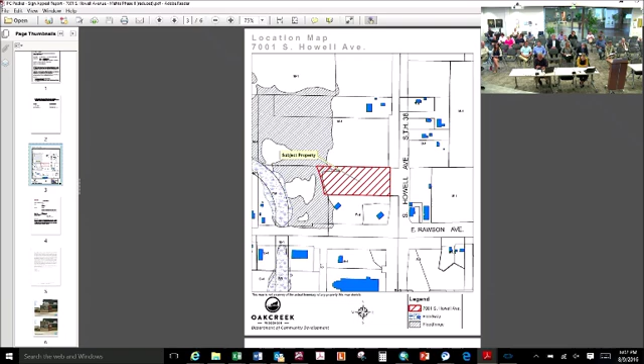This is a public hearing. It is now open. If anyone wishes to have comments, they can step up to the podium, state your name, and address the Plan Commission with your concerns. Make 3 calls for public comment on this item. First call. Second call. Third and final call for public hearing on the sign appeal for the property at 7003 South Howell Avenue.

Seeing no one coming forward, we'll close the public hearing, move to discussion of new business, and the first item is item 5A. It's a consideration of a request for sign appeal for the property at 7003 South Howell Avenue, submitted by Pamela Mehta, that would allow a ground sign not to exceed 12 feet in height and not to exceed 100 square feet on one side or 200 square feet on all sides.

Tax key number 734-9028. Pete: As I mentioned in the public hearing notice, the applicant is looking for a variance from the sign height for ground signs. If you're familiar with the site, it's the medical complex on Howell Avenue, north of Rawson.

And right now, they currently have an 8-foot monument sign, which is illustrated on your screen on the top of the page. And as we talked about at an earlier Plan Commission, they are proposing a building number 2 that is located right behind this building. And we worked with the applicant, tried to figure out alternatives to what could be done and still meet the criteria that is used to determine a variance, which is included in your report.

So the applicant believes that this is the best course of action to pursue, and to add 4 feet to the existing ground sign. By doing this, it would not cause confusion or cluttering of signs that would be confusing to drivers driving up and down Howell Avenue.

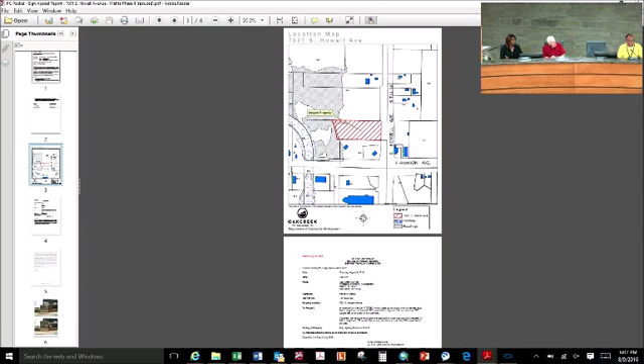Off the top of my head, I believe that's 14 feet, maybe 17 feet tall. That was a variance that was granted because in that particular case, they went from a 25-foot tall sign and came back and said they'd make it less, make it a directory sign, more simple, identifying the 3 businesses there, as well as having an EMC board.

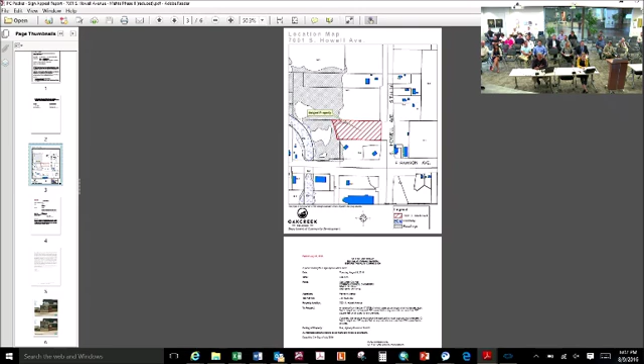Commissioner Chandler: Is the applicant here? I have a quick question for you. Name and address for the record. My name's Peter Ogorick, architect with Perspective Design, 11525 West North Avenue, Wauwatosa.

So how many tenants are in this area total? The building in the front, I believe, was designed for 8 tenants, if I remember correctly. The building in the back, I think, is 7. So 7 in the back, and 8 in the front.

So the number of spaces you have on there, is it 16? Must be 9 in the front and 7 in the back. So yeah, we laid it out to have basically a sign panel for each tenant space.

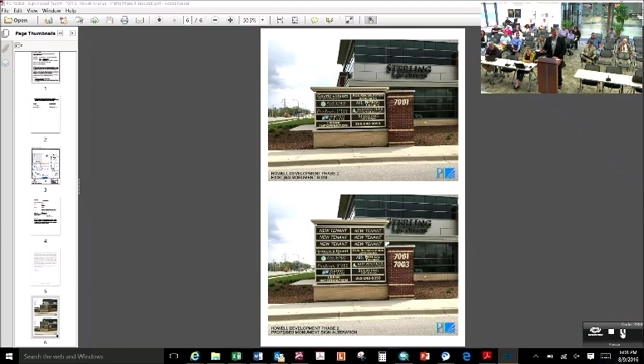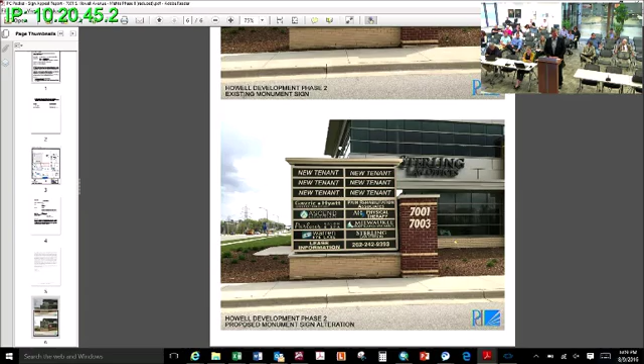Also with the letters, are there any differences that will help differentiate each tenant? Because that is a lot of information on one side. We'll be discussing the balance of the sign plan next on the agenda. For the building signage, we're trying to leave that open so individual tenants can have their corporate colors and logo. On the monument sign in front, we've intentionally tried to keep a uniform color effect so it's not any more cluttered than it already may be.

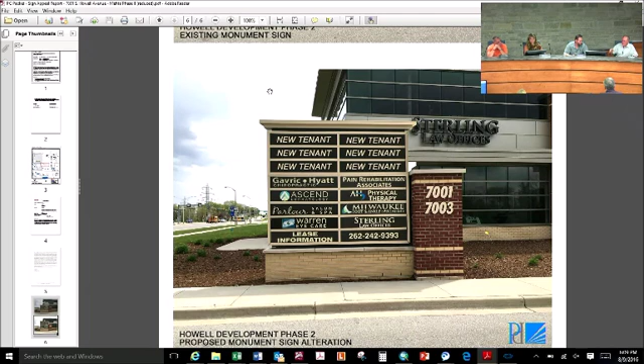Commissioner Dickman: If they went to a second sign of this type, that would require a variance also, right? Correct. So whether we have this variance or do a variance for that, I'm all for this. I think it's better to have just one sign, although there's quite a few people on there. I don't want to talk about the sign design now, but I don't know if you'd want to differentiate on the sign so people knew which ones were in one building versus the other. Just a comment, that's all.

Other questions or comments? Commissioner Siebert: How many tenants do you have in the back? The building in the back is designed for 7 tenants. We don't have any tenants right now, but it's designed to accommodate 7. And on your sign, I see it only has space for 6 tenants. Yeah, that's because we had one extra sign panel from the front building. If you look, I think we're at 9.

So we have 10 sign panels that were on there initially, but the building was designed for 9 tenants. So we've got a balance now between the number of panels and the number of spaces that are designed into the 2 buildings.

Anybody else? Seeing nothing, hearing nothing, motion on 5A. Is there a motion required, Pete? Yes, there is. I thought that would be covered in 5B maybe. 5B is the sign plan for a multi-tenant building, which is required. Commissioner Dickman challenging the chair?

Go ahead. Oh, you making it? Oh, go ahead, Pete. Bukiewicz will make a motion that the Plan Commission approve the proposed sign plan for Building 2, granting a variance from 8 foot to 12 foot at 7001 South Howell Avenue. Guzekowski will second. Guzekowski seconds, roll call.

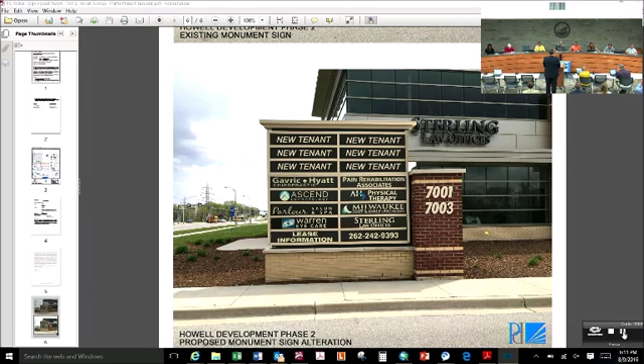Hickman, aye. Bukiewicz, aye. Speedy, aye. Guzekowski, aye. Seifert, aye. Chandler, aye. And moving to item 5B is a sign plan review of a proposed sign plan submitted by Pamela Mehta for the commercial building at 7003 South Howell Avenue, tax key number 734-9028.

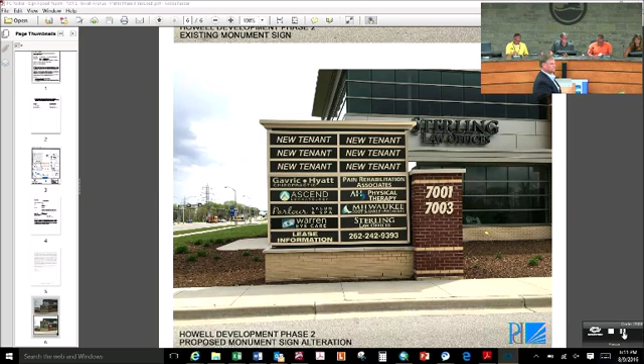Pete? Yes, thank you. I'm just bringing up that plan. The reason we had the variance prior to the sign plan is because in the sign plan is included a 12-foot monument sign. So before we went to the sign plan, we should make sure that we agreed that the monument sign was acceptable.

As per code, every multi-tenant, 3-tenant building or more is required to present a sign plan to the Plan Commission for approval. And the purpose is to get a theme or a sense of consistency among all the signs for the multiple tenants that may be present at the site.

So there was a building or a sign plan approved for Building 1. This is going to be the sign plan for Building 2. So anything that's approved tonight is going to be specifically for Building number 2 and for the monument sign.

And I just would like to share my opinion that the applicant provided a very robust and detailed sign plan that really details not only the style, the size, the quantity, the height. It also took a lot of the existing sign code and included it verbatim into this plan.

And the reason I take the extra time to say that is that when I looked at the sign plan for Building number 1, it was like, well, go no larger than 34 square feet and have channel letters. That was it. So I just want to give credit where credit's due that they did take a lot of time to go through it.

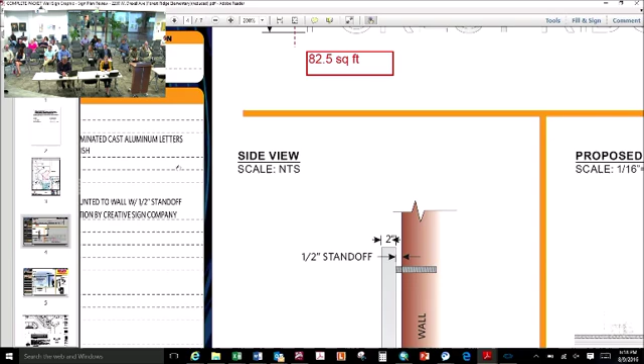As part of any institutional sign plan, Plan Commission does have the authority to review and approve all signs in that zoning district, which is why the school plan is here tonight. They have 2 signs; one is a wall sign that complies with the standards in our code. The standards state the wall sign shall not exceed 12 inches outside the building's wall surface, which is fine, and must not exceed 20% of the wall area, which it does not. It does not exceed 300 square feet in area or 5 feet in height. Overall, the wall sign is 82.5 square feet in area, 2 feet tall, and less than 20% of the wall area. This sign is not illuminated, is constructed out of aluminum, and will be placed on the south elevation of the building.

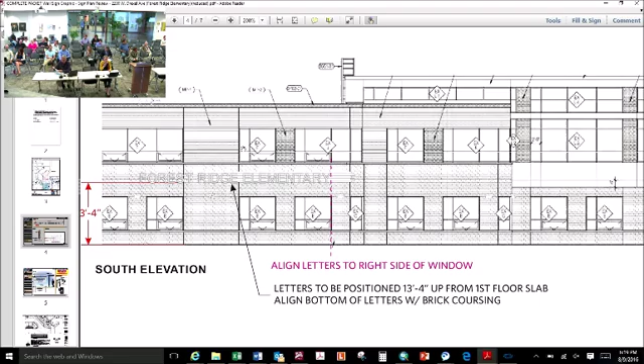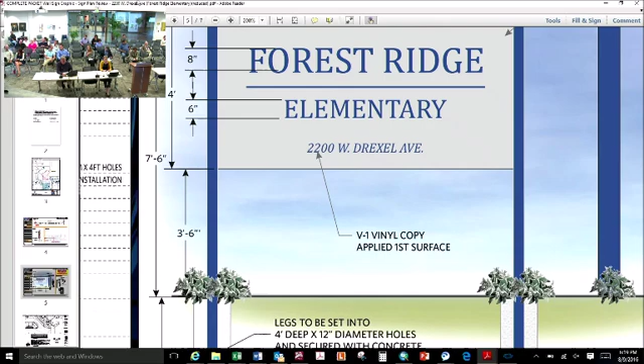The second sign being brought before you tonight is a monument sign. This sign also meets the zoning code for sign regulations. The sign does not exceed 10 feet in height, which is the maximum, and is not larger than 64 square feet in area. It is located well within the setbacks of 10 feet from the right-of-way or other lot lines, and complies with the traffic safety visibility requirements set forth in section 170401. What's not shown here is the landscape plan, but I do have it in your packet and can bring it up for your review; this is just a clip of it.

This just shows some shrubs that are going to be around it, and some flowers and annuals, which is the minimum requirement for this type of sign. Having said that, staff recommends approval of the sign plan proposed by the school district for Forest Ridge Elementary School, located at 2200 West Drexel Avenue.

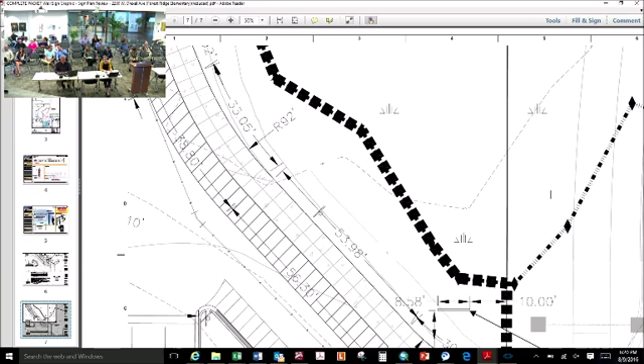This is for the new 7th elementary school for the district. Any questions from the commission? Commissioner Chandler: I have a question for the applicant. Is Kathy Kramer here, or the representative? Please state your name and address for the record. Bob Weigert from Epstein Uhen Architects, 333 East Chicago Street, Milwaukee.

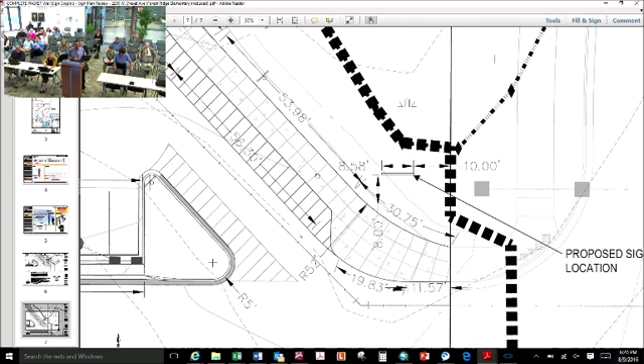Regarding the wall sign, can you give more information about colors and its relationship to the monument sign? Sure, the wall sign is an aluminum color that basically matches the window system of the building, a clear anodized aluminum. The monument sign is also aluminum, with blue painted legs, a baked-on finish. The field where the letters are is a similar finish, not clear anodized, but more of a silver type color. So the wall sign will match the background of the monument sign? Correct. Thank you. Other questions?

Alderman Markiewicz: this doesn't exactly pertain to the sign, but it's for Kathy. All our schools have mascots, has this particular school picked one? They did, and I can't remember what it is. I think the parent group worked on that when they decided the name. I'm not sure if it was suggested, but the Butler Garter Snakes came up as a suggestion, I think, but I'm not sure.

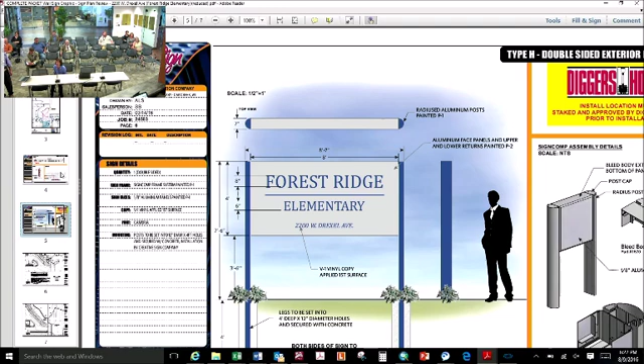I'll have to follow up with you on that, I can't remember if Mr. Midtake finalized it. I know it was in discussions, and we have the ribbon cutting scheduled for August 29th, so you should have that history of the Butler Garter Snakes by then. Great, anything else? Nope, looks good. Motion.

Kavich makes a motion that the Plan Commission approve the sign plan for Forest Ridge Elementary School located at 2200 West Drexel Avenue. Guzikowski seconds. Roll call: Hickman, aye. Johnston, aye. Furlong, aye. Kavich, aye. Guzikowski, aye. Seifert, aye. Chandler, aye.

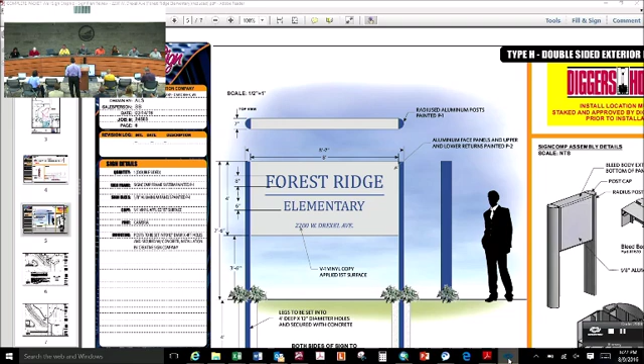Good luck, thank you, see you. See you on the 27th.

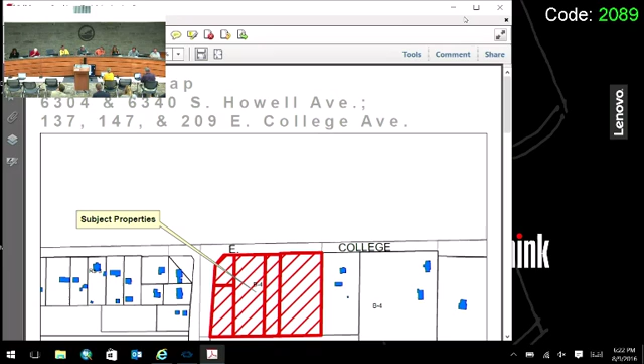Moving on, item 5D is a certified survey map review submitted by Kelly Gallagher of Self Storage Ventures LLC, combining the properties located at 6304 and 6340 South Howell Avenue and 137, 147, and 209 East College Avenue, tax key numbers as listed.

This application is to combine the five parcels into one 6.2873 acre parcel. This is the proposed survey map shown on the screen right now. As you can see, the wetlands are shown on one parcel. There is a requirement for the utility easement to be shown along the north and west. I was also told the state may have some access requirements on the west side, possibly a restriction, which we'll find out once the state completes its review of the certified survey map.

The staff recommendation is that the Plan Commission recommends to the Common Council that the certified survey map submitted by Kelly Gallagher of Self Storage Ventures LLC for the properties at 6304 and 6340 South Howell Avenue, 137, 147, and 209 East College Avenue be approved subject to conditions 1 and 2.

Thank you, Carrie. Any questions? No questions, motion.

Kavich makes a motion that the Plan Commission recommend to the Common Council that the certified survey map submitted by Kelly Gallagher, Self Storage Ventures LLC, for the properties at 6304 and 6340 South Howell Avenue, 137, 147, and 209 East College be approved with the following conditions: 1, that all easements are shown and clearly labeled on the map prior to recording; 2, that all technical corrections, including but not limited to spelling errors, minor coordinate geometry corrections, and corrections required for compliance with the municipal code and Wisconsin statutes are made prior to recording.

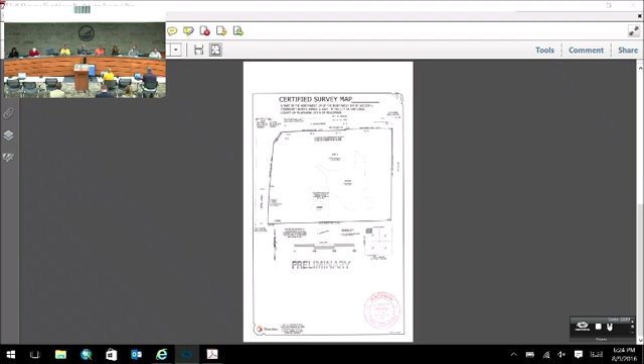Item 5E is a right-of-way vacation request submitted by HSI Oak Creek Partners LLC on behalf of Mary Volker, Margaret Munson, and Life Creek Church, Inc., for a portion of the southeast quarter of the southwest quarter of Section 10, affecting 2100, 2200, and 2280 West Drexel Avenues. Carrie.

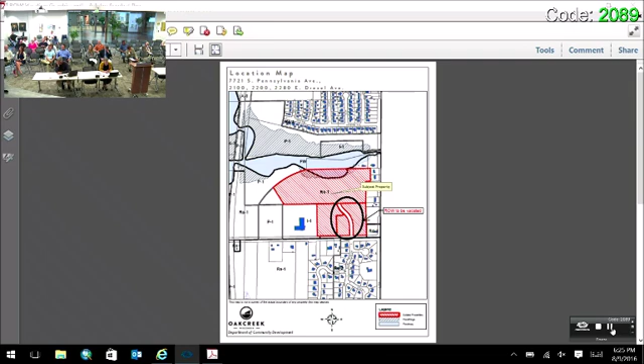This is a request to vacate a portion of the existing public right-of-way. In 2010, a CSM was approved that dedicated the 70-foot wide right-of-way for public street purposes, done by the church. This exhibit shows the part of the public street right-of-way that would be vacated if the Plan Commission and the council were to approve this.

Instead of having it be a public road, the proposal is to make a private road that would not necessarily follow this exact pattern. It's related to the multifamily development for these properties. There is a requirement requested by the utility that a 25-foot water main easement be depicted on all of the submitted recording documents for this property.

The staff recommendation is that the Plan Commission recommend to the Common Council that the 70-foot wide unimproved right-of-way affecting a portion of the southeast quarter of the southwest quarter of Section 10, between 2200 and 2280 West Drexel and between 2100 and 2280 West Drexel, be vacated after a public hearing.

Mr. Mayor, right-of-way vacation request. Questions from the commission? I also have two audience members who have requested this. Commissioner Chandler, and then I'll go to Commissioner Seibert.

A quick question, Carrie. Can you show us the area being considered for vacation? Is it the area that's circled? Yes, it's the area that's circled, that portion of right-of-way right there. Okay, thank you. Mr. Seibert.

I'd like to know the reason why they want to make this a private road. I will defer to the applicant. Applicant is here—name and address for the record. Tony DeRosa with HSI Properties, 18500 West Corporate Drive in Brookfield.

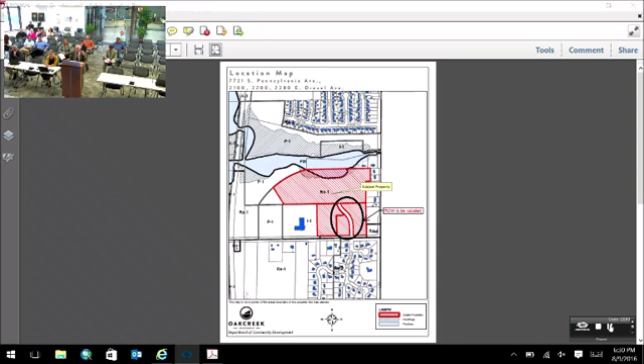We need a public road there. And not only that, but think of all the utilities that have to be handled for each individual party in this area, all coming out of a private road which is not built to public specifications. It doesn't require any long-term upkeep, especially with the developer selling out to someone else.

As I mentioned before, safety is the important thing. How can we have a safe community if we've got 640 parking spaces as a build-out and somebody wants to have a rumble? All they have to do is block off one road, two roads, and no one has access. This cannot stand. Safety of our community is most important—the safety of our children—and making this a private road through this cannot stand. We have public roads for a good reason.

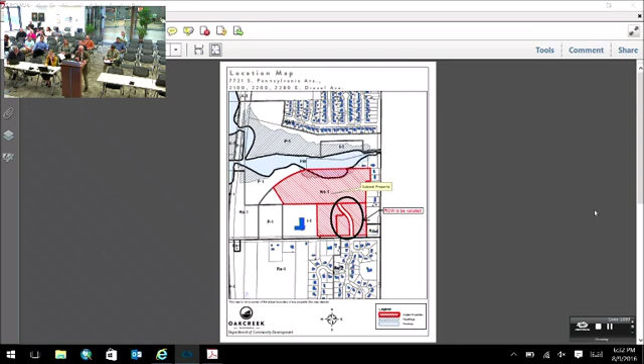Public roads for a good reason, not for the monetary rise of the developer, but for the individuals living in our city. We need public roads, we need safety. As I mentioned before, we need electronic signals for these multiple cars and for the buses to stop and pick up children, as well as these utility pickup collection vehicles. This cannot stand. Thank you for your comments.

Mr. Miranda, do you have anything to add? Nothing? Any questions or other comments from the commission? Yeah, I got some.

As far as the road goes, public versus private, we just heard a rendition of a very passionate person on protecting public right-of-way and the need for public roads. We have over 200 miles of public roads within the city, just to be clear. This is a private road. This is going to save taxpayers money. We're very prudent about this. This is no different than any condo development, standard development we do. It can still be accessed by the public, but it is maintained by the private ownership. As far as upkeep of that road goes, it will be demanded by those that rent it and those that own it, so the city is off the hook for that burden. Again, the easements will be there for us to access publicly. This is really just pretty standard operating procedure for development of this sort. So I'll leave it at that.

Well said, Commissioner Dickman. I just want to say, I think we're way off base on this. All we're talking about right now is vacation and property. Many of these comments could come later in our discussions. So I'd like to make a motion just on the vacation of property.

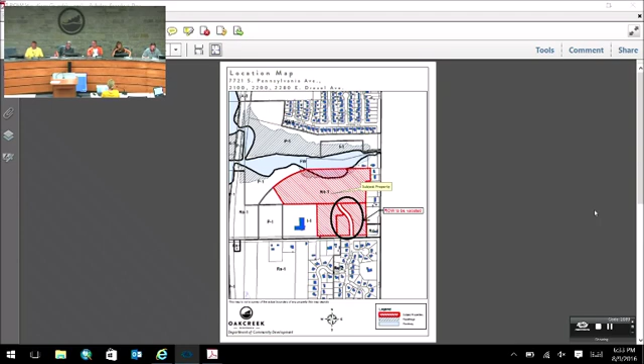That the Plan Commission recommend to the Common Council that the 70-foot wide unimproved right-of-way affecting a portion of the southeast one quarter of the southwest one quarter of Section 10, between 2200 and 2280 West Drexel Avenue and between 2100 and 2280 West Drexel Avenue, be vacated after a public hearing.

Review a proposed amendment to the official map for a portion, 48,383 square feet, of the southeast quarter of the southwest quarter of Section 10, which includes mapped unimproved right-of-way between 2200 and 2280 West Drexel Avenue, between 2100 and 2280 West Drexel Avenue. Carrie.

This is in regards to the same location, but there are officially mapped streets that affect all of the properties proposed for the multifamily development. So this would allow for access roads and driveways for the entire development to be private. The official map amendment does not impact any properties except those under control of the applicants. The staff recommendation is that the Plan Commission recommends to the Common Council that the official map for the southeast quarter of the southwest quarter of Section 10, Town 5 North, Range 22 East, be amended as discussed and illustrated after a public hearing.

Mr. Mayor, thank you Carrie. Any questions on the changes to the official map? Commissioner Chandler, I have a question for planning.

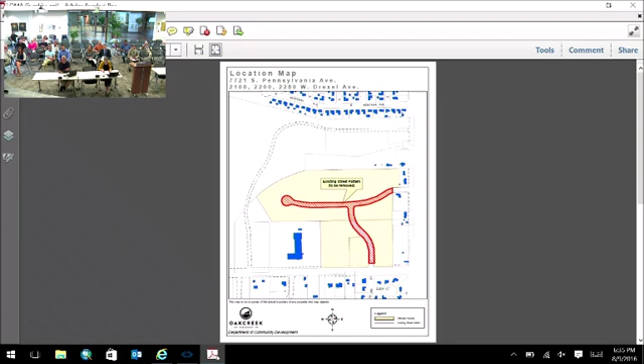So if all these roads are private, what are the requirements for private roads versus public roads, are they similar? They are different, and I would like to defer to Commissioner Johnston, who knows more about that than I. The private roads are usually constructed without the right-of-way requirements that public roads have. They're able to get their utilities in. Water is typically the only one that goes in as a public requirement regardless of where it's at, and that's just for the service required for the water. Engineering recommends that this is a private road, but we're fine with this development and approve it as it is.

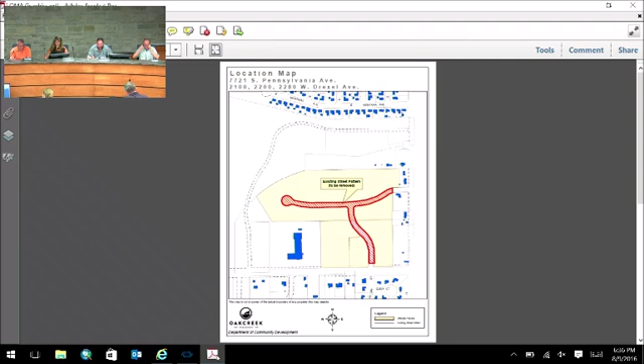Thank you. Anything else? Motion. Johnston moves that the Plan Commission recommends to the Common Council that the official map for the southeast quarter, the southwest quarter, Section 10, Town 5 North, Range 22 East, be amended as discussed and illustrated after a public hearing.

Seifert seconds. Roll call. Hickman, aye. Johnston, aye. Grillo, aye. David, aye. Speedy, aye. Guzekowski, aye. Seifert, aye. Chandler, aye. And item 5G is a certified survey map review submitted by HSI Oak Creek Partners LLC.

On behalf of Mary Volker, Margaret Munson, and Life Creek Church, Inc., for the properties at 7721 South Pennsylvania Avenue and 2100, 2200, and 2280 East Drexel Avenue, tax key numbers as listed. Carrie: related to the same property, this would reconfigure the existing 4 lots into 3 lots of compliant size for the development.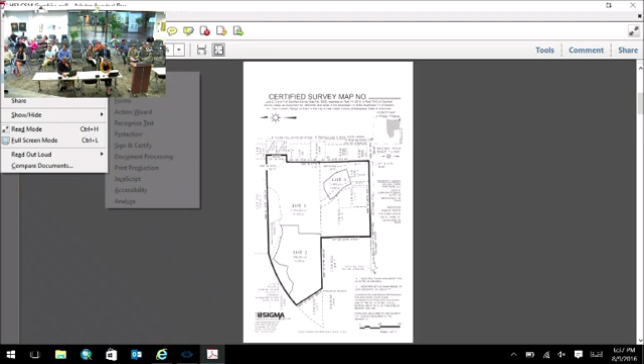Now you'll see that Drexel Avenue is on the southern part of the page, and you will be going into the property from Drexel Avenue. This shows lots 1, 2, and 3.

Minor changes may be forthcoming to the lot lines to ensure setback compliance. Staff has been working with the applicant on a couple of setback requirement issues with the site plan with regards to parking, and we continue to work through those. The changes are so minor that they wouldn't even necessarily show up in this map that the Plan Commission would be able to make a determination on.

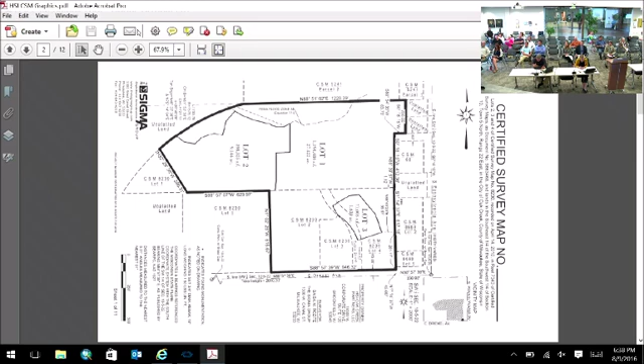There is also a driveway for the Life Creek Church property on the southwest corner of Lot 1 that is not shown. It will need to appear on the CSM prior to recording, and it will need a cross-access easement.

Wetlands also do not appear on Lot 1. That will be required to be shown on all pages as required, as they show up on the property. There's a public right-of-way along Drexel Avenue that needs to be shown at 65 feet wide, and also the 25-foot water main easement for public water, as we've discussed in the other items.

Applicant is aware of these things. These are minor changes. Staff recommendation is that the Plan Commission recommends to the Common Council that the certified survey map submitted by Mary Volker, Margaret Munson, Life Creek Church, Inc., and HSI Properties, LLC for the properties at 7721 South Pennsylvania Avenue and 2100, 2200, and 2280 East Drexel Avenue be approved, subject to conditions 1 through 4.

Mr. Mayor. Questions on the certified survey map?

Commissioner Dickman: And this is divided up into Lot 1 and 2, which is for the 2 phases of the development as far as building the units, and Lot 3 is for the clubhouse, et cetera. Is that a problem, shall we say, from the city standpoint, if they decide to develop property or Lot 1, which would be the first multifamily, and decide not to build on Lot 2 or do the clubhouse Lot 3? Would it be better to have it just as all one lot rather than 3? Just a question.

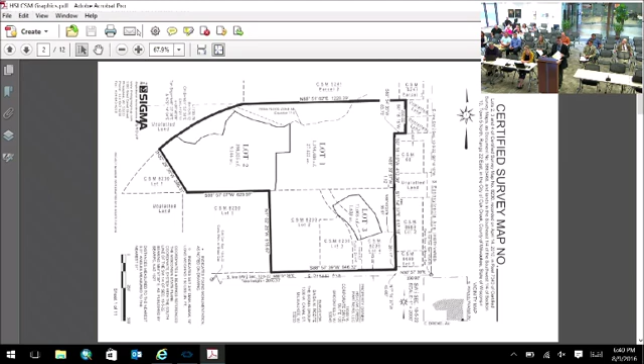Thank you. Other questions? Seeing none, motion on 5G.

David, you'll make, oh, go. Oh, you going? Yeah, I'll go ahead. Go ahead. Dick makes a motion, the Plan Commission recommends to the Common Council that the certified survey map submitted by Mary Volker, Margaret Munson, Life Creek Church Incorporated, HSI Properties LLC, for the properties at 7721 South Pennsylvania Avenue

and 2100, 2200, and 2280 East Drexel Avenue be approved with the following conditions. Number one, that all easements are shown and clearly labeled on the map prior to recording.

Number two, that the delineated wetlands are shown on all applicable sheets of the map prior to recording. Number three, that the 65-foot wide public right-of-way along Drexel Avenue is shown on the map prior to recording. And number four, that all technical corrections, including but not limited to spelling errors, minor coordinate geometry corrections, and corrections required for compliance with the municipal code and Wisconsin statutes are made prior to recording.

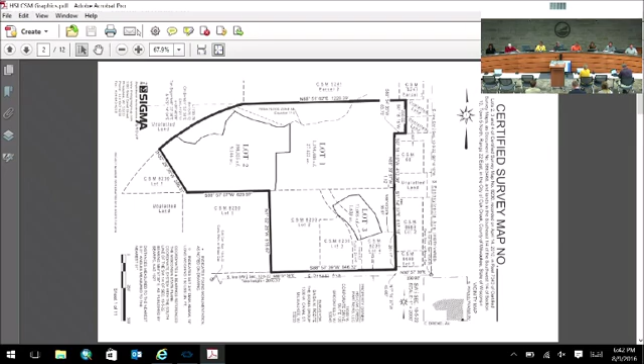Item 5H is a plan review of site, building, landscaping, and lighting plans submitted by HSI Oak Creek Partners LLC on behalf of Mary Volker, Margaret Munson, and Life Creek Church, Inc. for the properties at 7721 South Pennsylvania Avenue, 2100, 2200, and 2280 East Drexel Avenue, tax key numbers as listed.

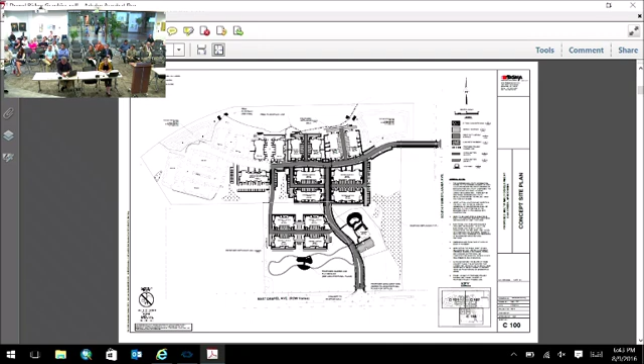Parking is sufficient according to code and the requirements for the PUD. There might be some slight modifications to the plans that are required to meet setbacks. We are working with the applicant through these issues, and we continue to do so. All the buildings meet required setbacks.

The clubhouse and the residential buildings will be constructed primarily of brick and cultured stone with some fiber cement siding and vertical fiber cement panels. The brick and the stone will need to meet the 4-inch thick requirement per code. Also, the use of fiber cement requires a 3/4 majority approval of the Plan Commission.

65% of the exterior wall area of multifamily residential buildings must be brick or decorative masonry per code. It's up to the Plan Commission whether the fiber cement fulfills this requirement.

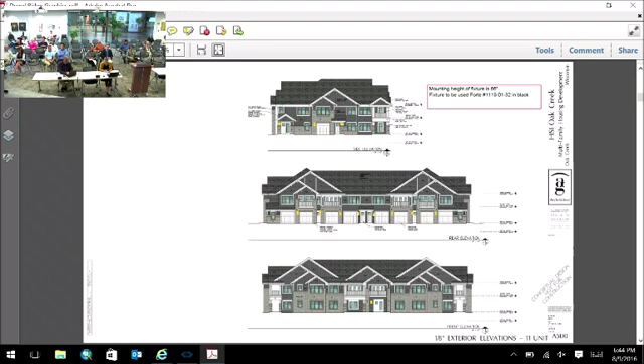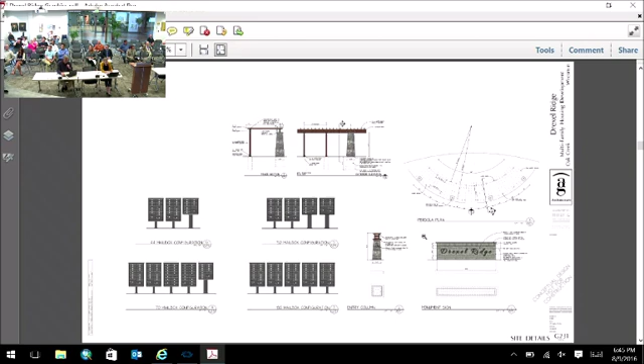There are a couple of signs and columns that are proposed at the entrances—one along Drexel and one along the Pennsylvania Avenue entrance. There's one monument sign that's proposed, and that's at the Drexel Avenue entrance, and that would be this sign right here. So again, brick with the name of the proposed development, which is Drexel Ridge.

There is a request for the sign to be externally illuminated. That's up to the Plan Commission as to whether or not they want that to be allowed.

The columns that are going to be at each of the entrances look like this. We have been in discussions with the applicant to reduce the height to match the requirement for monument signs, which is 6 feet, and the applicant has indicated their willingness to reduce the height of these. Also, they need to be pulled back so that they're completely on the property. That change has already been made.

Trash enclosures are proposed for each of the group of buildings. They will be constructed of fiber cement siding and vinyl fence panel gates. Landscaping plans have been proposed and they have been included in your packets. There may be some minor revisions needed.

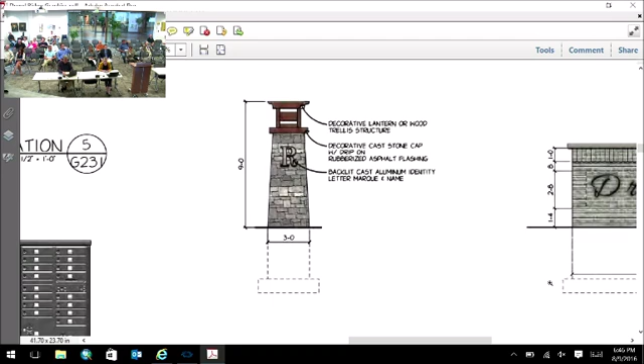There is a condition of approval recommended for the final approval to be by the Director of Community Development prior to the issuance of building permits. Also incorporate the comments from the previous items as discussed, in terms of utility easements and right-of-way easements, etcetera. The staff recommendation is that the Plan Commission approve the site and building plans for the multifamily residential development located at 7721 South Pennsylvania Avenue and 2100, 2200, and 2280 East Drexel Avenue, subject to conditions 1 through 9. I apologize for the incorrect address in the staff recommendation for the original packet.

Thank you, Carrie. Questions on site, building, landscape, or lighting? Commissioner Chandler? I have a question for the applicant.

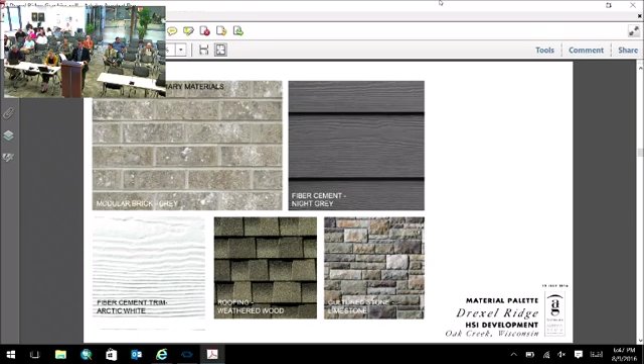Do you have the actual materials that are being used? Yes, we do. And we also have, if the commission is interested, renderings that we can share, as well as a fly-through model that we put together. I think that provides a very unique perspective of the project. If you're interested in seeing it, I believe Ms. Papelbon does have that available. Can we have it run while you're talking? Sure. We have our architect, Eric Harmon, with AG Architects here this evening to talk through material samples and further describe the design of the building.

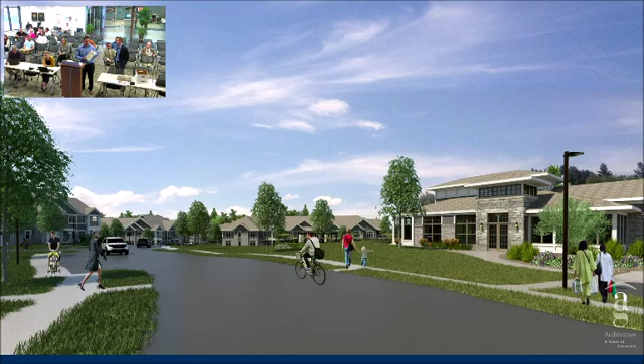So the primary material on the 11, 15, and 20 unit buildings would be this Sioux City brick. It is light gray in nature with a gray base to that brick form. So instead of a red bodied brick where chipping would show the red brick showing through, we've chosen a gray bodied brick. So in the case of chipping or masonry that may be raked too deep, it is a strong, consistent color.

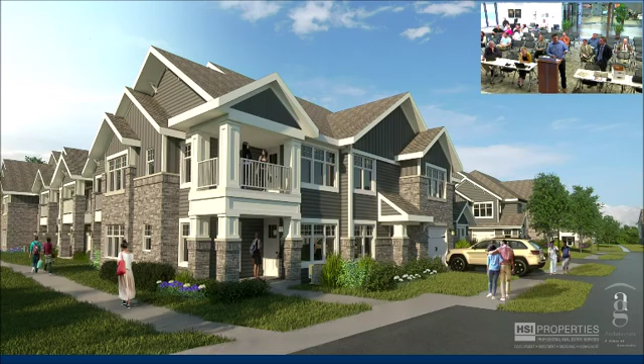The fiber cement siding and panel and trim work would be the night gray, which has a bit of a blue tint to it. Works very well with the gray brick. And then all windows would be trimmed out, windows and doors would be trimmed out in a white trim panel product.

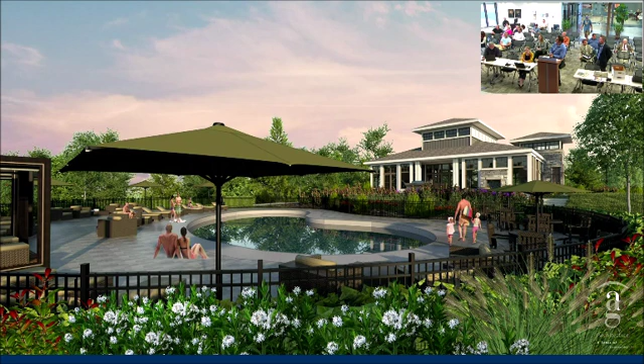One of the key pieces here, if we are on the clubhouse, that's a good view to stop.

Right now, the primary material on the clubhouse, in addition to the same brick that you will see on the remainder of the buildings, the entry will be significantly increased with the use of the stone material here. We're also bringing it around to the fireplace that's on the pool side. We'll also be wrapping the grill station and any outdoor elements around the pool. This is the same stone that would be used in the walls around the pergola that's around the landscaped playground area.

If we could go back to any of the renderings of the building, there's another one. Speak on the mic, please. If we could go one more, and one more. There we go. Sorry, you were better off the last one.

So this image shows that the roof lines are the primary vision for what you see as you approach the building once you pass those 11 unit buildings. The other details on the building, in addition to the brick and the fiber cement, is the additional accessorizing that we're doing throughout with the carriage-style garage doors.

The garage doors will have this similar shaker style as we are doing on the entry doors to continue that character, whether you're on the front, sides, or back of the building. We don't have the liberty here of having two-sided architecture that only faces the road on one side. Instead, we have four-sided, which is visible from all points on site.

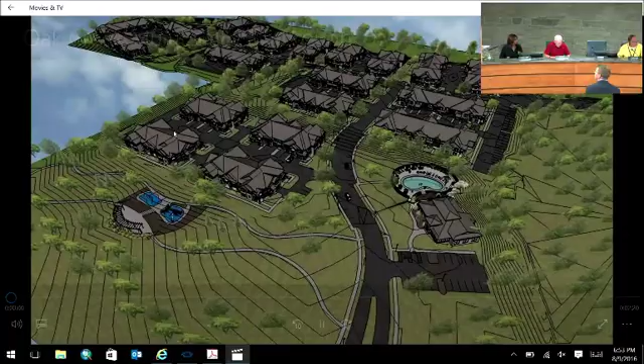Thank you. Other questions? Alderman Bekavich? I guess it's more of a comment. The fiber cement board, we go through this every now and then. It's an acceptable material. Given the design of these particular breakup of it, I think it's justified use.

Yes, I don't believe that your mic is picking up your comments.

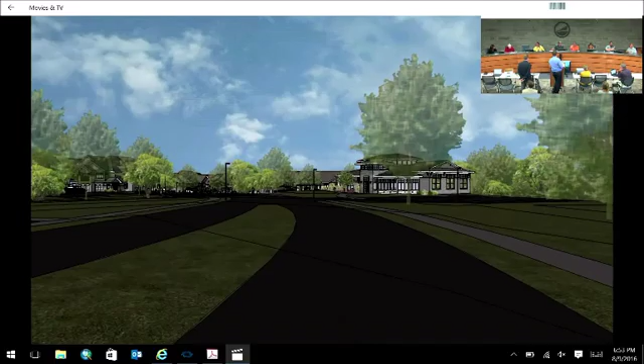I'm sorry, I guess I'll just start over. I'm addressing the fiber cement and its acceptable use in this particular project.

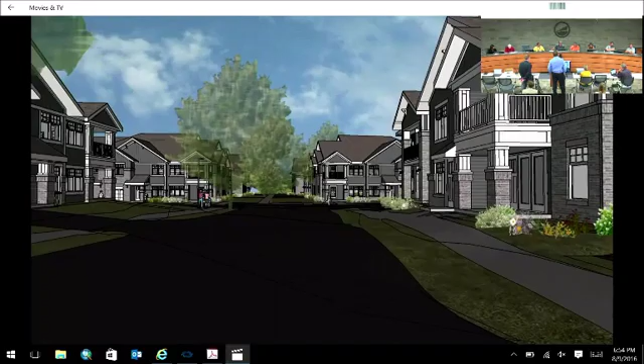We've gone through this a couple of times. I find, in the design aspect on these buildings in conjunction with the brick, that there's a good balanced amount, and I would consider it an acceptable material to meet the minimum. I actually really like the design of this and the breakout, the way it's been done with the brick, the stone, and particularly I like the white trim.

I guess maybe I'm just a huge fan of the color combination. I like the layout of it. I think it's a very classical look. I think the gable look is very timeless. Really gives it that neighborhood feeling. So I'm really liking what I see right here.

So I guess the only other questions I'd have is maybe for the fire department, with anything they have regarding these buildings, turnarounds, hydrants, or if we're overlooking something material-wise.

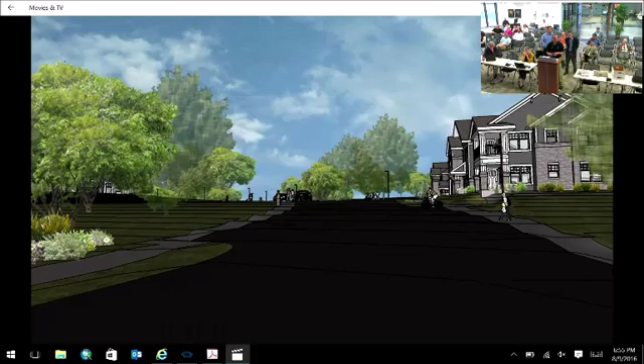Mike Kresick, Fire Department. I'll answer in some generalizations. We have spent quite a bit of time looking at access to this site, access roads around the property. We've come up with an adequate solution for the fire department, and HSI has worked with us to accomplish that. As far as hydrant placement, we did meet with HSI and the water utility to work out an efficient model for hydrant placement around the site. Once again, that's adequate for the fire department's needs.

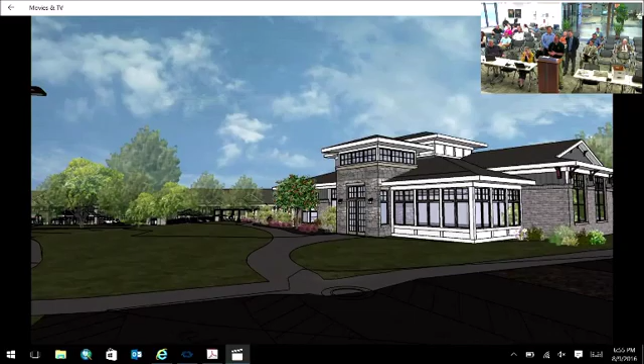Any other questions? I guess I'm thinking, is everything going to be done at once? Was the hydrant plan done for the entire thing, or just phase 1 and lot 3 for the clubhouse? Do you go in sections or do you lay out the whole thing right away?

I think that would be best answered in collaboration with the water utility, because certainly the placement of their infrastructure would kind of be dictated by the phases of the project. What we tried to identify with the early phase of the project is that there was adequate hydrant placement for those structures, while also identifying that the hydrants needed to be in place prior to the buildings going above grade. And I feel we've accomplished that.

One feature that we did note, on the western side of the portion, there is an access road going from the north to the south. That's an integral piece that will be part of the initial phase to allow fire department access throughout. I guess it'd be best explained as if you split the property in half, with the northwest corner being the later phase, that road that progresses north to south would be included in phase 1. Probably didn't do a good job explaining that, but I think I got you. I know which road you're talking about. Okay.

Commissioner Dickman? Not so much the buildings or anything. As we scan through these drawings, I happen to notice a couple of these that show a car parked in the driveway, a short car that almost blocks the sidewalk. You know, I know that we're always concerned with the sidewalks and people walking. I've been in some subdivisions, not Oak Creek, but in other areas, where with the short driveways, people have a long pickup truck or something, you know, these are so big. And what you're doing is you walk, and then you have to walk out into the street to go around to get back on the sidewalk. How much room is there really from the front of the garage to the sidewalk?

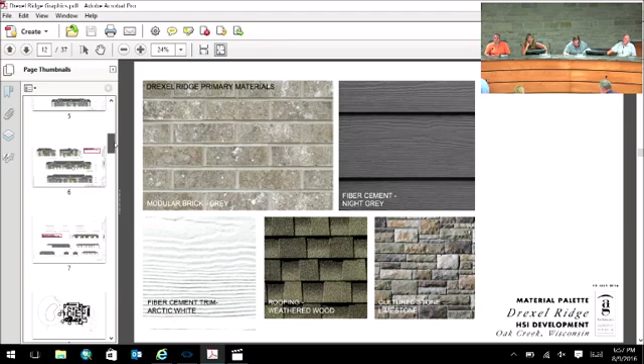The typical length is 18 feet to match a parking stall. That is not met in all conditions, but those areas where they are not met is on the property nearest the floodplain area. Those do not meet the full 18, but it's not in a heavily trafficked area. It would be primarily just for the 4 or 5 apartments that are back there.

I'm more concerned with the people walking on the sidewalk, that the vehicles would be too far back. 18 feet, I'm sure, would be adequate for almost anything, but some of these shorter ones might be less than the length of a standard parking stall. If I'm standing across the street on Drexel Avenue and I'm looking towards your development, what do I see?

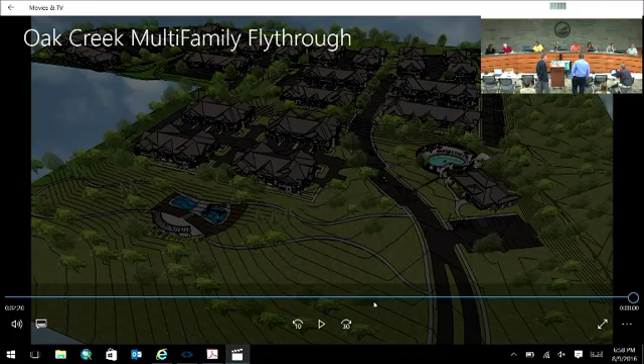After the fly-through goes over the top and gives a strong overview, we swoop down to the point where we are entering the site off of Drexel. There is not actually sky below the grade, that's just the program.

So at this point, if we could pause. This is the primary view coming off of Drexel. You're getting the front shot of the first two 11-unit buildings, presenting the best face of those buildings.

And then you're getting the entry and corner sequence of the clubhouse as your primary view coming in. This video also shows that as you get further back into the site, your primary experience is of the roof lines as the grade steps down about 40 feet. Front to back is a 40-foot drop, I believe that's the number.

Commissioner Chandler: I noticed there's a steel fence in our packet. What locations will have this fence? That fencing would be for locations where we have retaining walls.

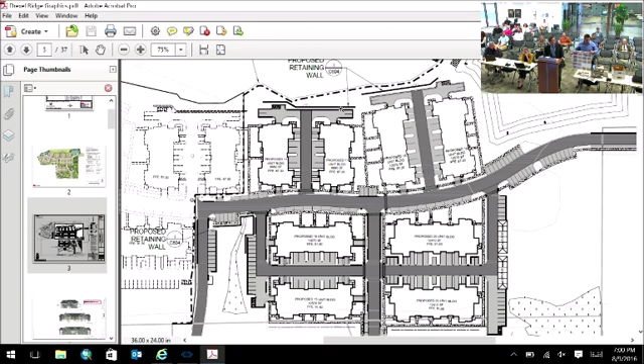Those are the thicker black lines you see on the north, right where the cursor is now. There's a retaining wall right there up against the floodplain. No retaining walls around the clubhouse, but if you scroll down, this plan does show one at the far west end of the site. There's actually a potential that one could be eliminated based on grading.

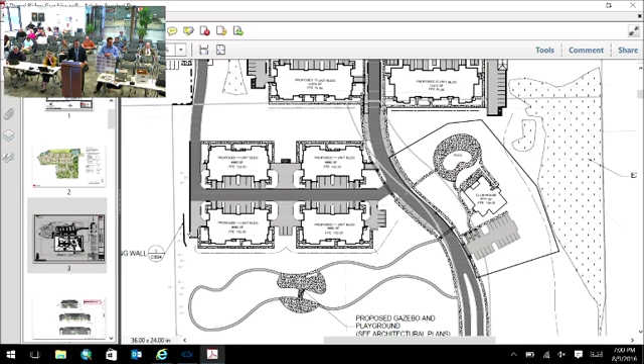Also, for the entrance, the decorative entry columns, can you show us that again? The location of these columns, are there just two? Yes, there are two, they flank the entrance.

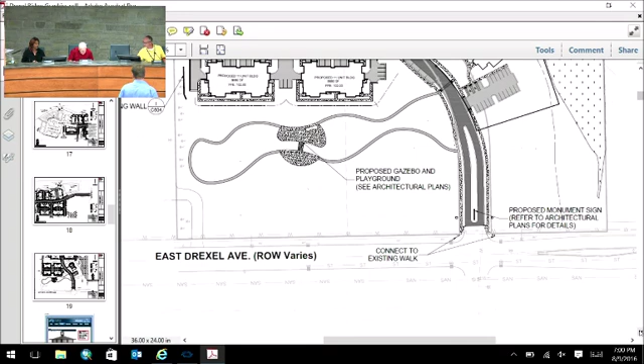Is that the entrance we just went over? Correct. There's actually four, two at each entrance. So on either side of the road off of Drexel, there's one, these two little boxes here. And then we talked about moving the other two to be about right here on either side of this drive.

And will that also have a monument sign? No, that will not. Okay, thank you.

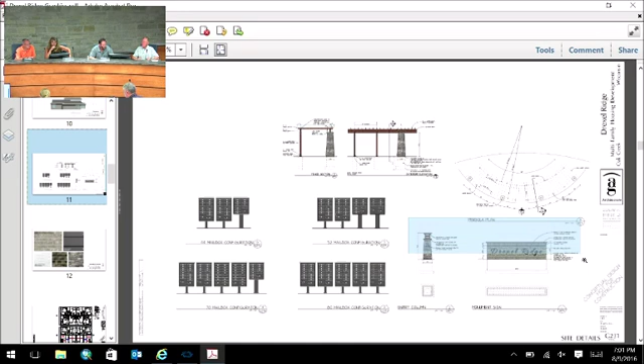Commissioner Dickman: Could I follow up on that a little bit? We had talked earlier about whether the monument sign should be illuminated or not, and we had to bring it up. So my question on those columns, it looked like there were some little lanterns on top. If the monument sign did have illumination, would those be lit up also?

I could honestly tell you that's one of the pieces that's probably the most in limbo, the top of that column. We picture a lit lantern that would signify the entry, but it depends on a lot of the approvals we get here today.

Does the applicant have a preference on illuminating the monument sign? Yeah, our preference is that it is a lit sign. This is not going to be overly bright. What we had proposed in your packet was a backlit sign, which gives it a nice, soft, subtle glow, which could actually be a very attractive feature for the entrance. Okay, I would agree that it should be lit.

Alderman Guzikowski: I'm just looking at the overall plans, and I'm really pleased with how things have come together. I do agree with Commissioner Dickman on some of the parking stall areas that seem to be a little tight, but all in all, it's part of the nature of the beast right now. Overall, it's a really good looking plan.

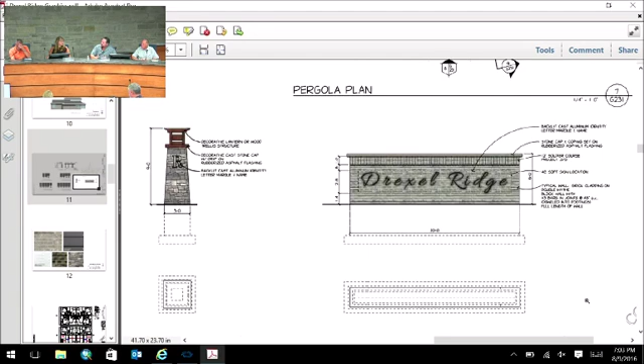Mr. Johnston: I just want to comment too, one thing that didn't show up in the flyby, but the plans reflect, they did go ahead and add curb and gutter to the project. So thank you. There's sidewalks that connect all the way through on the T roads, and also curb and gutter on those roads. So Mr. Degner will be happy about that sidewalk piece.

And you're happy about the curb. Win, win, win. You guys listened. Anybody else? Have your form. Mr. Miranda?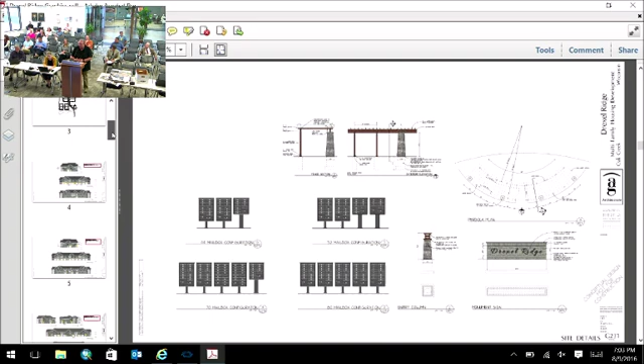Tony Miranda, 7675 South Pennsylvania Avenue. I don't know if this is the proper time to bring it up, but the retention pond, I was wondering if it would be possible to put some type of water aeration system in there, seeing as it's so close to residential properties. The threats of mosquitoes there would be pretty bad, and we don't know what that new mosquito down south is going to do, if it's going to migrate here or not. But I think that would be an option we should be looking at.

Okay, any comments, Brian, on that?

The vast majority of detention ponds in the city do not have any aeration that are in residential subdivisions, apartment complexes, in condo complexes. I can only think of a couple that do have aeration. Always a concern, but usually there is enough motion in the water because it's not just stagnant water that's there, that mosquitoes are not an issue.

Usually when you have stagnant water, it doesn't have any movement to it. How is there going to be movement in the water? Just air movements, wind movements. The water is below the air passage, but there's still movement on that water. Around the edge, yes.

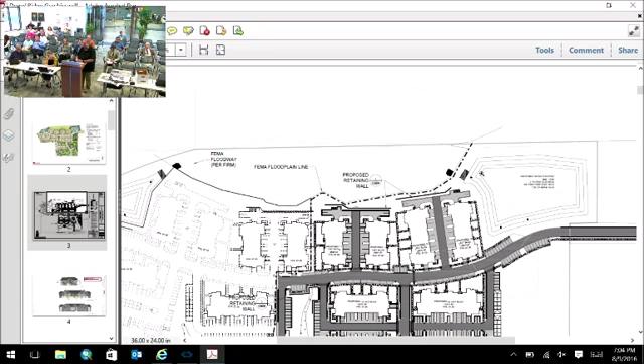Anything else? That's it, thank you. No other questions or comments? Motion on 5H.

Bukovic will make a motion that the Plan Commission approve the site and landscape and building plans. Dan, excuse me? Yeah, I'm sorry, let me give you the updated recommendation here. Oh, okay, I appreciate that. Thank you. Bukovic makes a motion that the Plan Commission approve the site, landscape, and building plans for the multifamily residential development located at 7721 South Pennsylvania Avenue and 2100, 2200, 2280 East Drexel Avenue, subject to the following conditions.

1, that all building and fire codes are met. 2, that all parking stalls meet the required setback per the approved conditions and restrictions. 3, that all decorative entry columns are revised to a maximum height of 6 feet located outside of the road's right-of-way and vision triangles and meet all setback requirements.

Do you want me to note that we're going to okay illumination for that? If you would, please. And also, they will be allowed to be illuminated as per the electrical inspector. Should I mention the monument sign too? Yeah, monument sign. Is it down the way? I don't think I have that in here, but I will make a note of that as well. Okay, we'd also like to include illumination of the monument sign in condition 3.

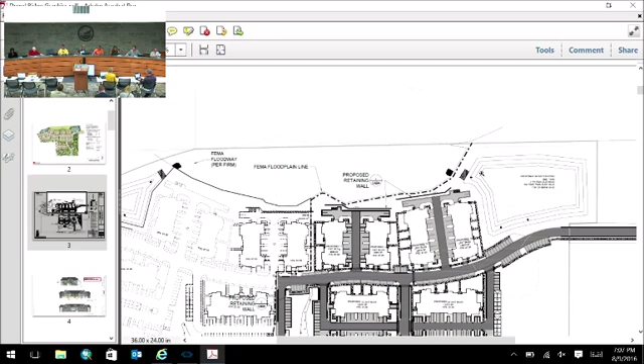Moving to 5I, the zoning text amendment for the proposed amendments to the general development plan, regulating plan for the Drexel Town Square mixed-use plan development district, to allow a drive-through, drive-up facility for the B5 building in the mixed-use sub-district Block B as a conditional use, and to allow drive-through, drive-up facilities for financial institutions, drugstores, pharmacies, and restaurants as conditional uses in the mixed-use sub-district for buildings B5, B1, B2, C1, and C2, located at 7940 South 6th Street, 7901 South Main Street, and 7902 South Main Street, tax key numbers as listed.

Carrie, as you mentioned Mr. Mayor, this actually affects pretty much 3 properties in Drexel Town Square. One, the one highlighted on the screen right now, that is the proposed location for the B5 building. The one on the screen now is the location of the proposed B1 buildings. And then, of course, the proposed location of the C1 building.

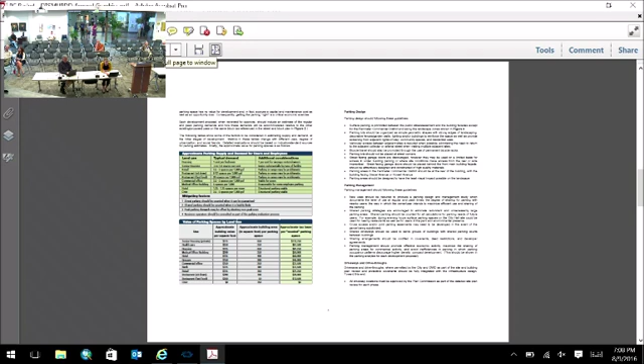Can't see it on the screen, but this is the part of the existing DTS MUPDD document that will be amended. It's driveways and drive-throughs, and the additional drive-through considerations on page 7. The current text says, drive-through facilities are allowed only in the perimeter commercial subdistrict, the large format retail subdistrict, the northern edge of the mixed-use subdistrict in Block B and Block C, which are buildings B1, B2, C1, and C2, and the library book drop-off.

The proposal is for the text to read, drive-through facilities are allowed only in the perimeter commercial subdistrict, the large format retail subdistrict, the northern edge of the mixed-use subdistrict in Block B, buildings B5, B1, and B2, and Block C, buildings C1 and C2, and the library book drop-off.

The next section of text that would be changed currently reads, due to the prominent location, although allowable, drive-up windows and lanes for buildings B1, B2, C1, and C2 will be held to the following requirements. The proposal is to have the text read, due to the prominent location, although allowable, drive-up windows and lanes for buildings B5, B1, B2, C1, and C2 will be held to the following requirements.

Currently, the text reads: quantity and width, drive-up lanes in the mixed-use subdistrict are limited to 1 per tenant, lane width to meet standard local code requirements.

The proposal is for the text to read: quantity and width, drive-up lanes in the mixed-use sub-district are limited to one per building, lane width to meet standard local code requirements.

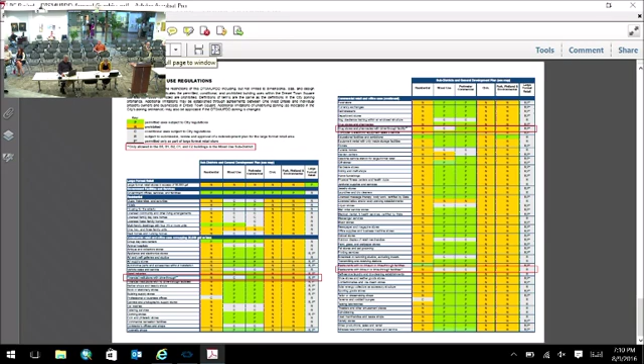We also propose to update the existing land use regulations in Table 1 to make it clear where the drive-through and drive-up facilities in the mixed-use district are proposed. Currently, it doesn't call out the specific buildings that the text does. The proposal would make that clear by adding an asterisk and an explanation for the 3 locations in the mixed-use subdistrict where drive-through facilities are mentioned: financial institutions, drugstores and pharmacies, and restaurants. Those would be clarified to be allowed in the B5, B1, B2, C1, and C2 buildings only.

The staff recommendation is that the Plan Commission recommends to the Common Council that the additional drive-through considerations section and Table 1 land use regulations in the Drexel Town Square Mixed Use Plan Development District General Development Plan and Regulating Plan be amended as presented after a public hearing.

Mr. Mayor, at the last meeting we debated for at least an hour on the financial institution drive-up window. What is this proposal doing to that discussion?

That allows it for the B5 building. Is that the building we talked about? That is correct, that's the only thing it does. It specifies that B5 is now included in that group of buildings where a drive-up or drive-through window would be allowed as a conditional use for financial institutions, drugstores or pharmacies, or restaurants with drive-up or drive-through facilities. In other words, it adds B5 to the mix of buildings that would allow that.

I don't remember restaurants coming up in last meeting's discussion. No, this is actually clarifying something in the land use table. We did talk about how the land use table doesn't specify the buildings that the text does. This just clarifies it. Okay.

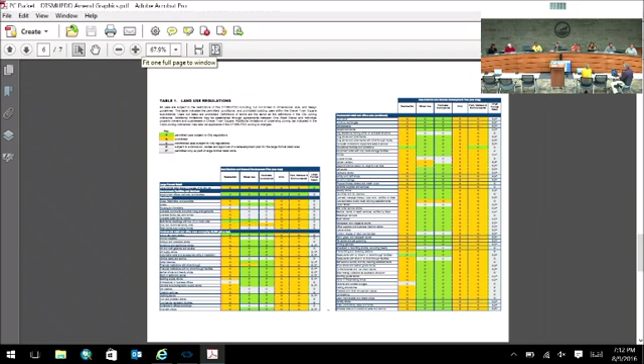So maybe I can clarify a little bit better. Table 1 right now for the land use regulations currently has restaurants with drive-through facilities allowed in the mixed-use district. The only change being proposed is that this table clarifies the specific buildings that are allowed. Correct. And the only building possible right now to have that drive-through option would be Building 5, which is what we're allowing for the financial institution, and you're now including that building with this other subset group.

That is correct. Okay, thank you for the clarification. I wanted to make sure. Did I understand that, Doug?

You look pissed. Oh, I am? I think it's your mic, too. Oh, sorry about that, I'm done talking. Boy, you came charging the podium. I'm like, holy cow, almost had to call security. Wasn't sure where he was going with that. I just wanted to make sure I was understanding.

Commissioner Sieber: Yeah, I have a question. With a single building that has multi-tenants, I get a little worried that you may have more than one tenant who would like to have a drive-up or drive-through window. That's the scary part I can see. I can see having one, but if you have 2 tenants that would like to have that, then I get a little concerned, especially about the safety aspect.

We considered that, and that's the reason we chose the proposed text in consideration of that particular concern. It's why we're limiting it to 1 per building rather than 1 per tenant. In other words, you would only be allowed to have 1 drive-up or drive-through facility in the building. So no multiple drive-throughs in that one building, correct.

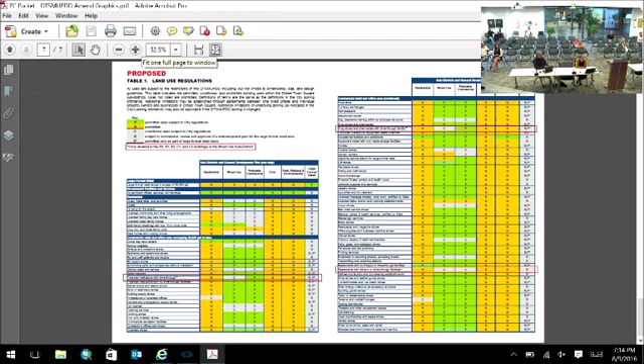Yeah, I'm just saying, but the way we've been going, a number of these people come up and say, well, gee, I'd like to add this, I'd like to do that. This allows one per building, okay, Mr. Dickman?

Final piece of the puzzle is the next item we have, right? That's correct, which is 5J, which tells you that there is only the financial institution with a drive-through. They're limited. So if anything else came up, it would have to come before us anyways, correct? It would require another text amendment at this point because we're only allowing one drive-up or drive-through window per building.

Mr. Johnston? Correct me if I'm wrong, Kerry, but this also states that for the mixed-use district, it is a conditional use to allow a drive-through. That is correct, it'd have to come back through the Plan Commission to get that approval regardless of what it is. Correct. Good clarification. Other questions?

Motion: David shall recommend that the Plan Commission recommend to the Common Council that the additional drive-through considerations section and Table 1 land use regulations in the Drexel Town Square Mixed-Use Planned Development District General Development Plan and Regulating Plan be amended as presented after a public hearing.

Guzekowski, second. Roll call: Dickman, aye. Johnston, aye. Grillo, aye. David, aye. Scooty, aye. Guzekowski, aye. Seifert, aye.

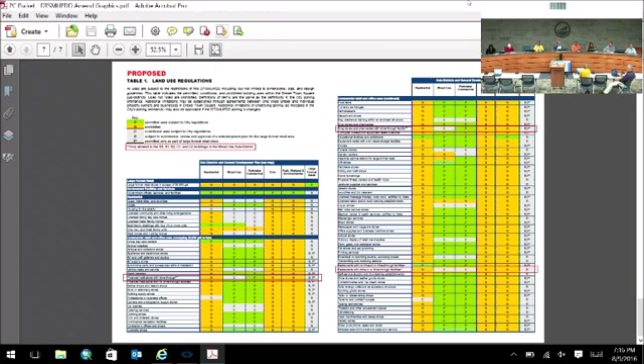Chandler, aye. And the last item tonight is a conditional use permit request submitted by Blair Williams, Wired Properties, for a conditional use permit for a financial institution with drive-through, drive-up facility in the B5 building at 7940 South 6th Street, tax key number 813-9054.

Carrie: This is the building that we were just discussing. It is for the B5 Western tenant to have a drive-up window with a drive-through lane. Specifics related to hours of operation, number of employees per shift, and related business operations are currently being finalized. Those are usually things that we have as part of the conditions and restrictions, but those things are still being talked through. Information supplied by the applicant during the site and building plan review indicates that an estimated 20 employees per shift would be on site for the entire B5 building, and parking was approved as presented in the site plan review.

Proposed conditions and restrictions have been provided for the commission's consideration. If there are any questions on those proposed conditions and restrictions, I'd be happy to discuss those. I do want to point out that there is something in here on page 7 of 8 in section X, permitted uses: one financial institution with one drive-through lane and one drive-up window. It's very clear.

Carrie: There is also one other thing that I've highlighted on page 3 of 8, section 4J. Service and loading shall not occur in the drive-through lane during business hours for any tenant in the B5 building. My intention with that restriction was to prevent any possible conflict during business hours with the drive-through operation and potential loading, although we did hear during the site plan review that loading would not occur on that side of the building. It's just a precaution. It's up to the Plan Commission whether or not you want to allow that in the conditions and restrictions.

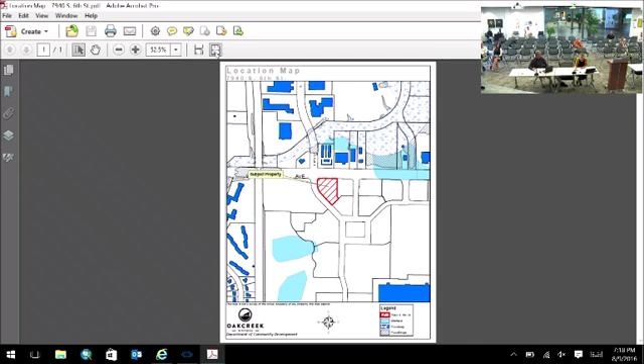Staff's recommendation is that the Plan Commission recommends that the Common Council approves a conditional use permit and adopts the conditions and restrictions for the conditional use permit, allowing a financial institution with a drive-through, drive-up facility located at 7940 South 6th Street after a public hearing. Mr. Mayor. Thank you, Carrie. Open it up for questions.

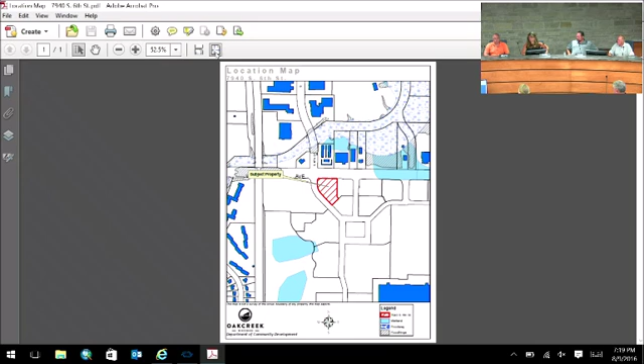Mr. Dickman? The item you highlighted about the service and loading, during business hours shall not be allowed. I think that's a good idea, we should leave it in there. I have a question for the applicant. Applicant, come forward. Mr. Blair Williams, come forward, please. Name and address for the record. Blair Williams, Wired Properties, 2022 East North Avenue, Milwaukee, 53202.

Can you provide a little more information on the hours of operation and the traffic that will be in this area? Not all of the tenant spaces have been leased to date. The hours of operation will vary meaningfully by tenant and use. The tenants that we have currently had extended conversations with, including the financial institution, would have what I would characterize as traditional retail business hours.

Opening in the morning and closing in the early evening. It is possible that in the other buildings, we actually have one space, as you may recall, that has the pergola extending to the south. We'd like to find a restaurant for that building, so I would expect those hours may be somewhat more extended.

Regarding details about quantities of customers specifically for the financial institution, I don't have a good quantitative answer, other than exactly what you would expect to see at a retail bank. They refer to those as their retail locations - folks coming to drop off checks for deposit and potentially withdraw money. Steady but not overwhelming. I'd expect it to be rare that there would be a meaningful number of cars queued in that drive-up lane.

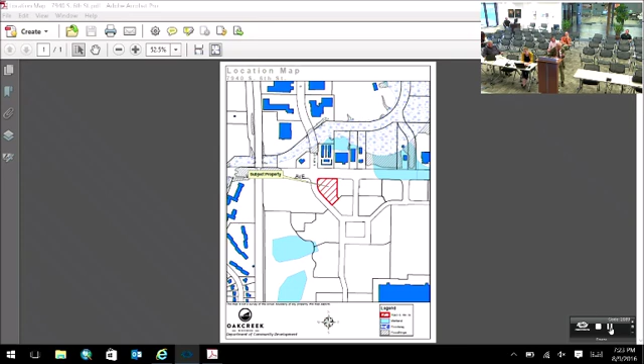With all due respect, Commissioner Seifert, I'd say competition drives and breeds competition. If you're talking about the financial institutions looking at coming here, there's a reason they're coming here. I can't fully answer that, but I'm going to go with Blair on this one. I understand what you're saying.

All right, anything else? Motion.

Bekavich moves that the Plan Commission recommend to the Common Council approval of a conditional use permit that adopts the conditions and restrictions for the conditional use permit, allowing a financial institution with a drive-through, drive-up facility located at 7940 South 6th Street, after a public hearing. Dickman seconds. Roll call: Dickman aye, Johnston aye, Grillo aye, Bekavich aye, Speedy aye, Kuzikowski aye, Seifert no, Chandler aye. Motion to adjourn.

Grillo moves to adjourn at 7:25. Kuzikowski seconds. Roll call: Dickman aye, Johnston aye, Grillo aye, Bekavich aye, Speedy yes, Kuzikowski aye, Seifert aye.

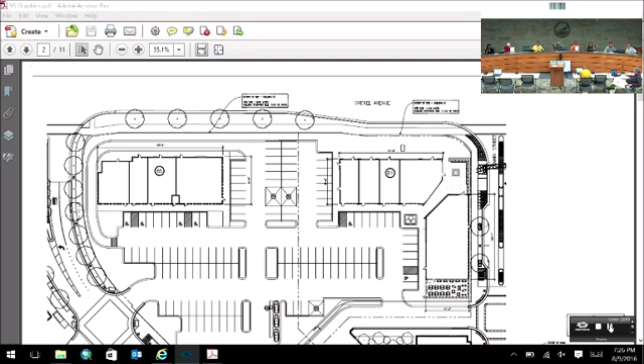Thank you for being here. Great work, Carrie and Pete. Doug, thanks for scaring us. You all have a good night. I've never seen him charged. We'll see you next Tuesday.